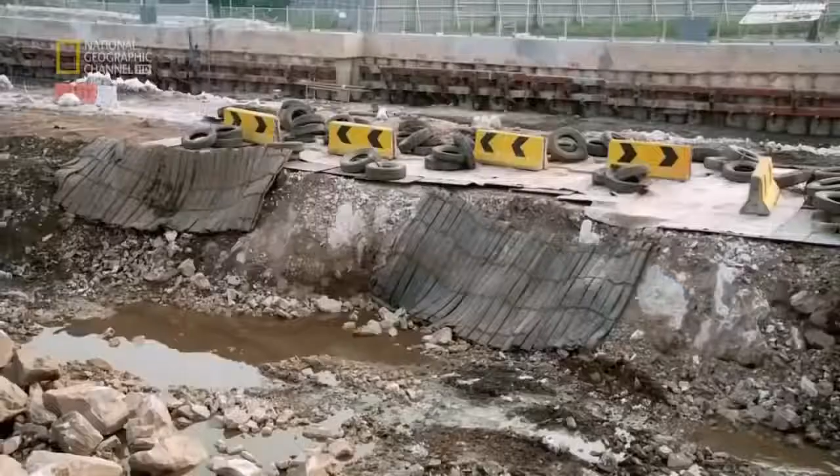Now there's an ambitious solution. A new transit system that will crisscross not only the city, but the entire region of Greater Kuala Lumpur. Huge machines will bore into Kuala Lumpur's treacherous bedrock to carve out almost 10 kilometers of tunnel.

Every day of construction, the engineers confront the perils of mechanical failure, fire, and collapse. Get it wrong and billions of dollars of investment could go to waste, and the streets of Kuala Lumpur and its pent-up economy will stay trapped in gridlock.

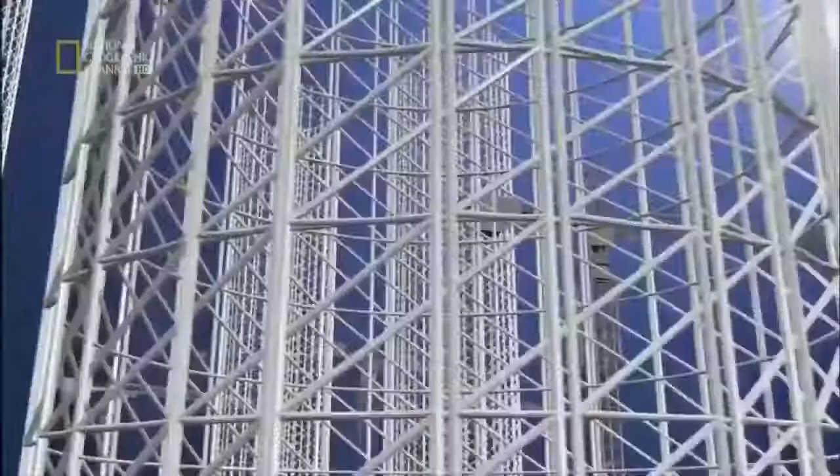Kuala Lumpur is one of Asia's most vibrant cities. It's looking to compete with the region's Asian tiger economies. Its magnificent skyline testifies to its soaring ambition. But at street level, it's a different story. The city is blighted by severe congestion that threatens its future growth.

Over 7 million people live and work in the Kuala Lumpur region, the Klang Valley. Every day, they head into town in 4 million cars. As an alternative, a light rail transit system was built. But over time, it has been overwhelmed, and connections are inadequate.

Now there's a solution. A new mass rapid transit system that will reduce the pressure on traffic and unite far-flung parts of the city. For any modern metropolis to be vibrant, to be competitive, to be on par with some of the leading cities in the world, you've got to have a modern public transport system.

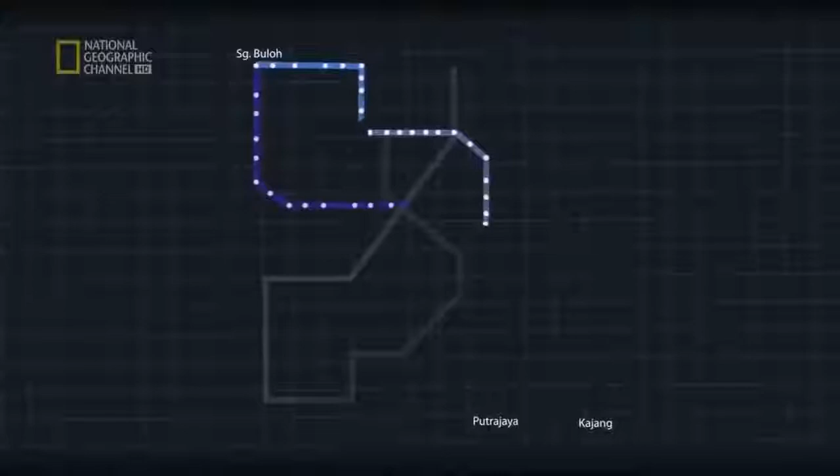The Klang Valley Mass Rapid Transit System, the KVMRT, is Kuala Lumpur's bid for greatness. 3 different routes comprising more than 150 kilometers of brand new lines. It will be seamless travel around the Klang Valley, especially the areas of high concentration population. And the first stage of the plan is the biggest test of all.

This is the Sungai Buloh Kajang line. It will stretch 51 kilometers with 31 new stations. And a fifth of the new line will have to be constructed underground. To do this, 10 giant tunnel boring machines, or TBMs, will be brought to Kuala Lumpur and set to work.

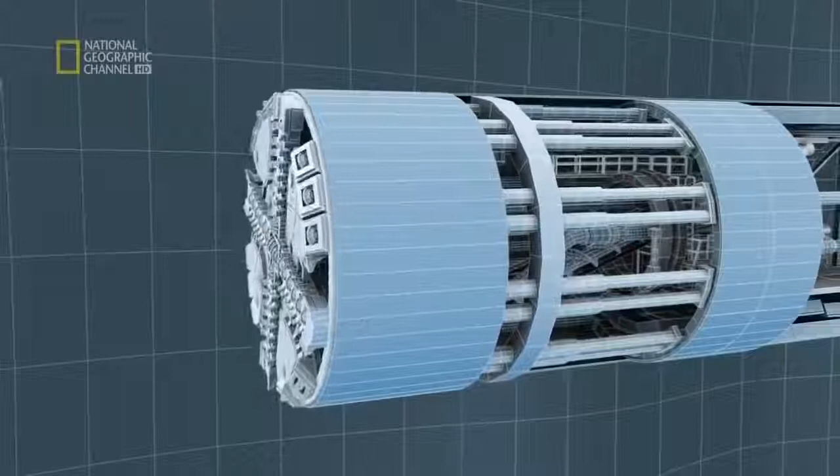These mighty engines do much more than burrow through rock, astonishing though that process is. As the huge drill crunches forward, the back end constructs the tough tunnel frame with high-strength concrete. In charge of this massive operation is engineering veteran Satpal Bogal.

Most cities now, for railway mass transit systems, the tunnels are built using TBMs because of safety issues and because of ground conditions. The underground section of the new MRT will be a perilous undertaking. For beneath Kuala Lumpur is a formidable engineering challenge.

Below the city are 2 very different kinds of rock, and the TBMs will have to deal with both. The western area is known as Kenny Hill, and the eastern areas as the Kuala Lumpur limestone. Imagine the difference between a Dutch Edam and a Swiss cheese riddled with holes. Dr. Uilian Hock is the project geologist and expert on Kuala Lumpur's underground world.

I got this Dutch Edam cheese here. As you can see, this whole piece of cheese is fairly homogeneous, very tight. And Kenny Hill, when it's bedded, it looks something like this. This is like the KL limestone. All right, this is Swiss cheese. As you can see, there are a lot of cavities and voids inside the cheese. These voids can be transmitted all the way to the other side of the cheese. Things can move in from one hole to another hole, and it may come in vertically and go out laterally.

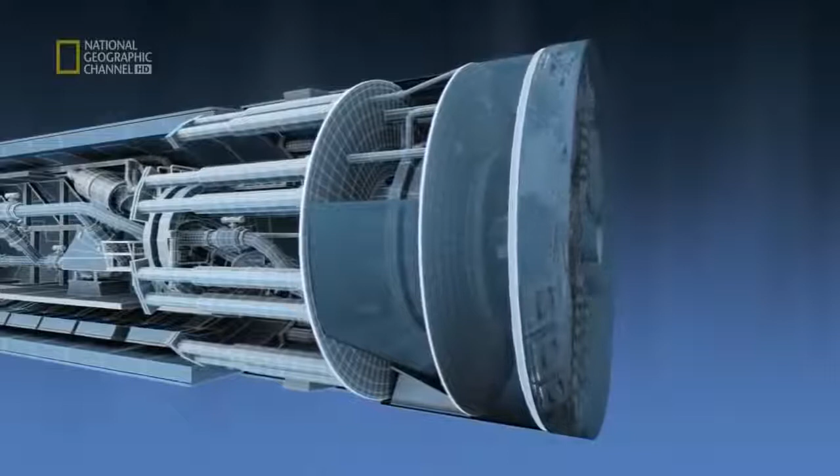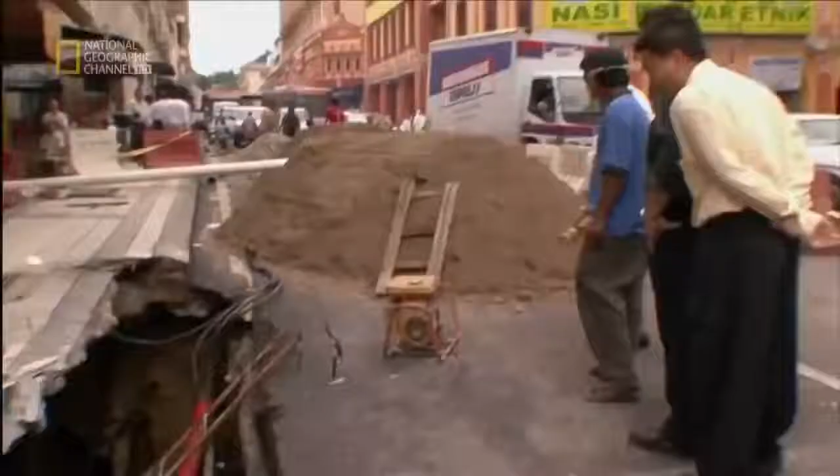This ingenious system was used by the engineers who built the SMART tunnel in Kuala Lumpur, the world's first combined storm and traffic tunnel. But builders learned some hard lessons about slurry. Ng Hawei was a rookie engineer on this project. We have the best machines in the world in the SMART project, but we still do have some problems. We just couldn't control the slurry and it easily escapes to the surface, creating sinkholes.

What Ng and the engineering team found, to their cost, was that the slurry they injected into the limestone cavities could escape into surrounding rocks and cause havoc, bursting from the ground like a geyser or creating sinkholes at the surface that might suck in people, cars, or buildings. Today, Ng heads the tunnel team building Kuala Lumpur's MRT system. And this time, he had to find a solution to the uncontrollable slurry problem.

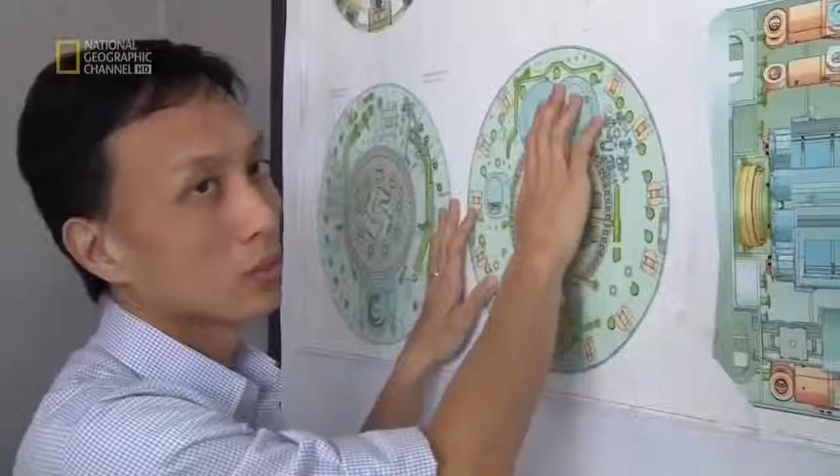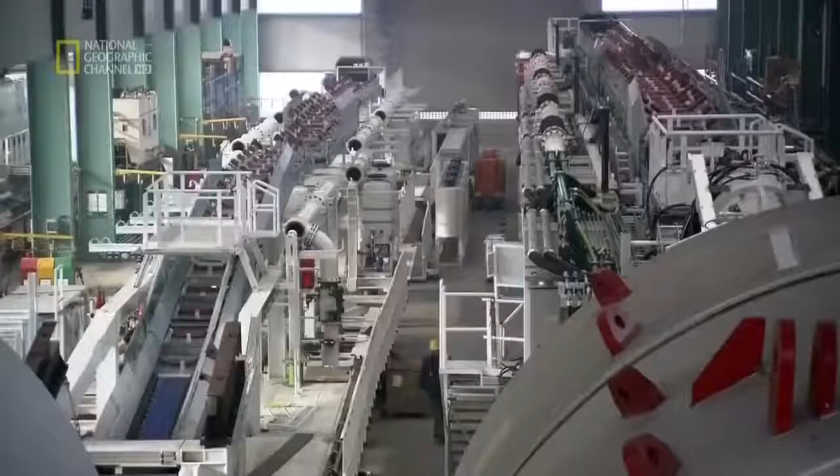Working with German company Herrenknecht, Ng and the team of engineers have come up with a revolutionary kind of machine. We throw in all the ideas, we have brainstorming sessions, we consult a lot of experts, we have to do a lot of research because no machine has been designed like this before. From these brainstorming sessions was born this mighty machine. Called the Variable Density Machine, it's the state-of-the-art tunneler. For the first time, a TBM can control the consistency of the slurry and take on whatever Kuala Lumpur's underground throws at it. Even the construction of this revolutionary machine is on an epic scale.

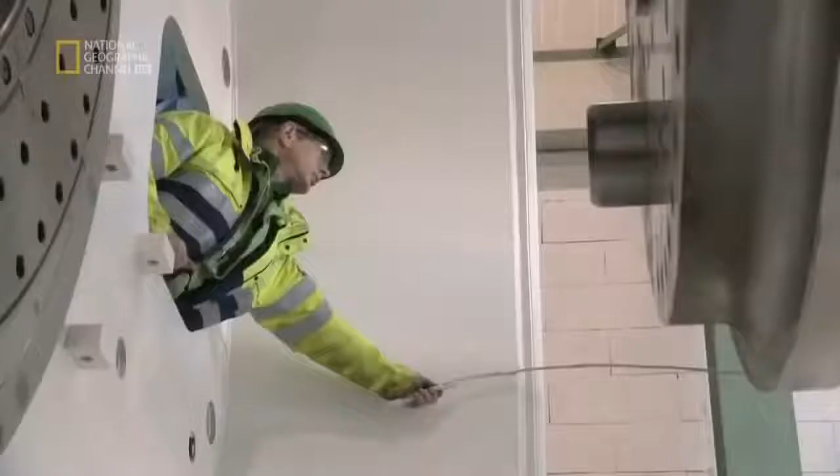Components are brought from all over Europe to be assembled inside the massive factory in Schwanau in Germany and other Herrenknecht plants in China. One machine like this is fitted together with about 40,000 pieces one by one. The design starts screw by screw, piece by piece, and this is brought together with all our 400 engineers. They do all these works to come to this level, what you can see today. It takes 9 months to manufacture the revolutionary TBM.

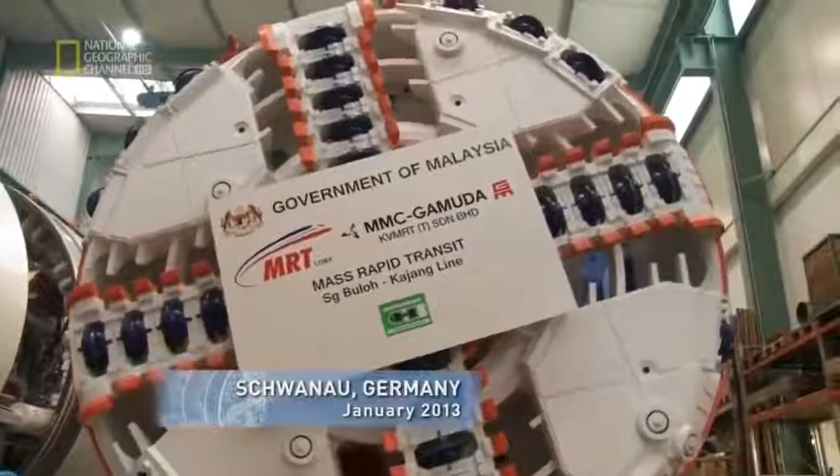Today, it's ready to be put through its paces. We have only seen it on the drawing board so far. So this is the first time that it is all put together. Everything is running, so we can check every equipment, including the cutter heads, the hydraulics, the safety features. This is the last chance for us to make final modifications before we send it to the site and put it in the ground. As the engineers work on the TBMs in Germany, work gets underway in Kuala Lumpur.

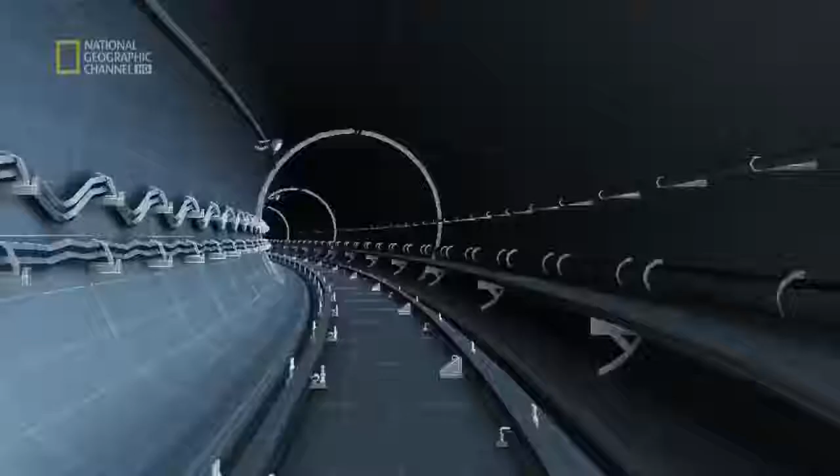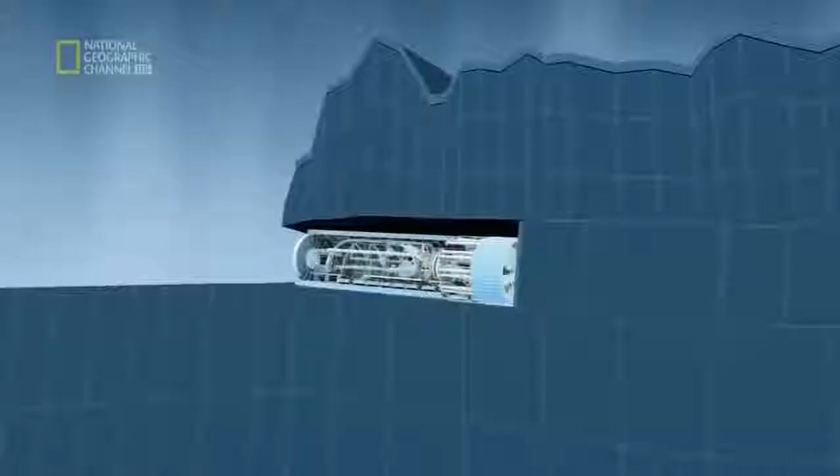The engineering company in charge of tunneling, MMC Gamuda KVMRT, must complete the job in 24 months and with minimum disruption to the city above. The operation is conceived on a military scale and with military precision. The TBMs will be launched from 4 different staging zones along the planned route of the underground section of the MRT. At the western end of the tunnel, the elevated section of the MRT begins its descent underground from the surface. But at the 3 other zones, shafts must be excavated so that the different TBMs can be put to work beneath the city. Eventually, the different sections of the 9.5-kilometer tunnel must all link together.

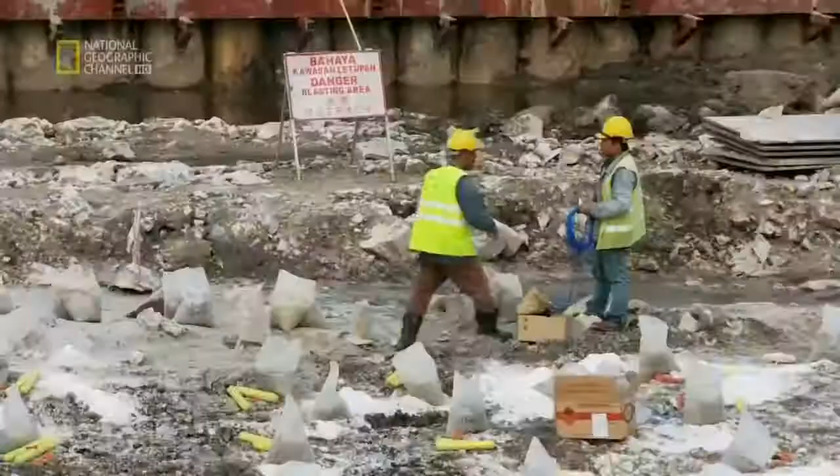Since July 2011, work on Kuala Lumpur's new MRT starts here at the Cochrane site. It must be dug out to a depth of 30 meters before 4 TBMs can be deployed. The huge staging zones will be blasted out of the ground. We have short time to meet our requirements, so we are working with frequent blasts, more than 2 or 3 blasts a day. The blasting must be carried out with rigorous precision, especially in a city as dense as Kuala Lumpur. So when you talk about blasting itself, it's dangerous.

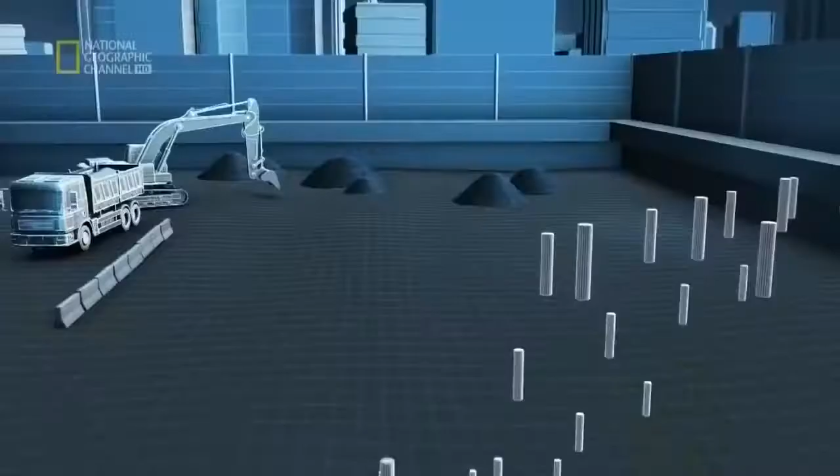You can see we've been surrounded by high-rise buildings. Now at the moment we're using about 150 to 200 kg. So that can bring a 10-story building down. The solution is to sequence each blast, creating a pressure wave that, in theory, won't damage surrounding buildings. These are the basic things we use. My hand now is explosive, which will be charged to the detonators over here, and it will be connected one at a time. And finally, we have relays. These will segregate the blasting rather than at one go.

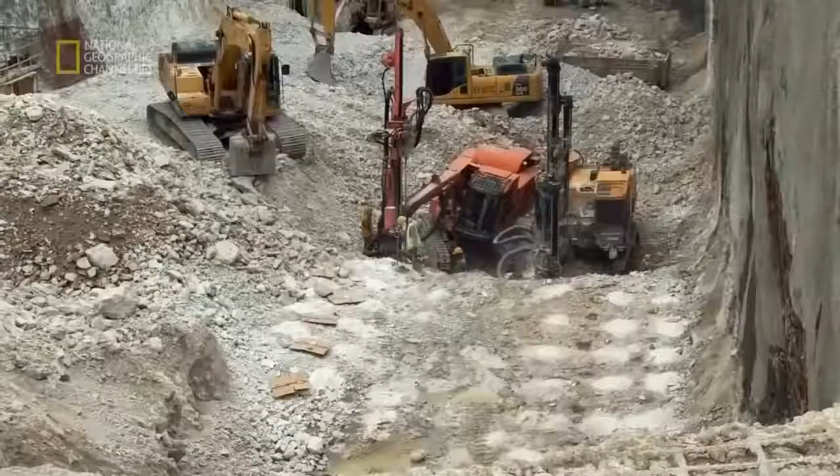Engineers dig rows of holes between 3 to 6 meters deep. Then the explosive charge is inserted inside with a detonator. These are connected to a central command point. But nothing is left to chance. Giant barriers of steel plates, truck tires, and concrete prevent debris flying from the site. The charge is set.

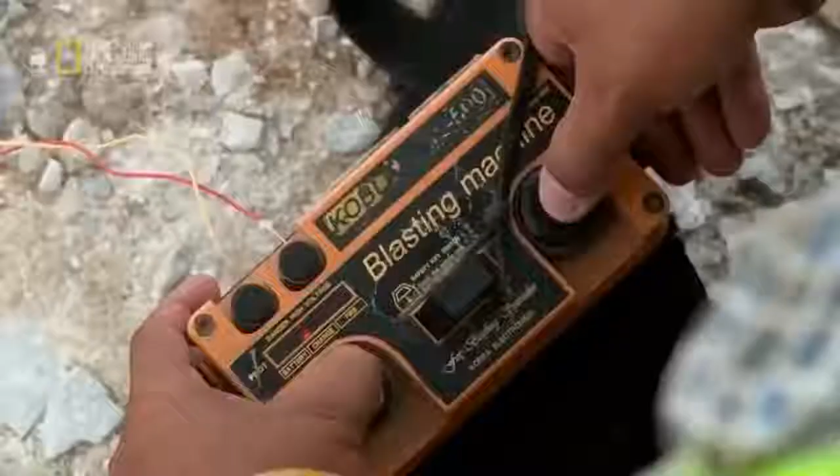The engineers have got the right formula, and the surrounding buildings are safe. The blasting continues at the Cochrane site for 7 explosive months. Enough rock and soil to fill 50 Olympic-sized swimming pools is blown out of the ground. And finally, the site is ready to receive the first TBM.

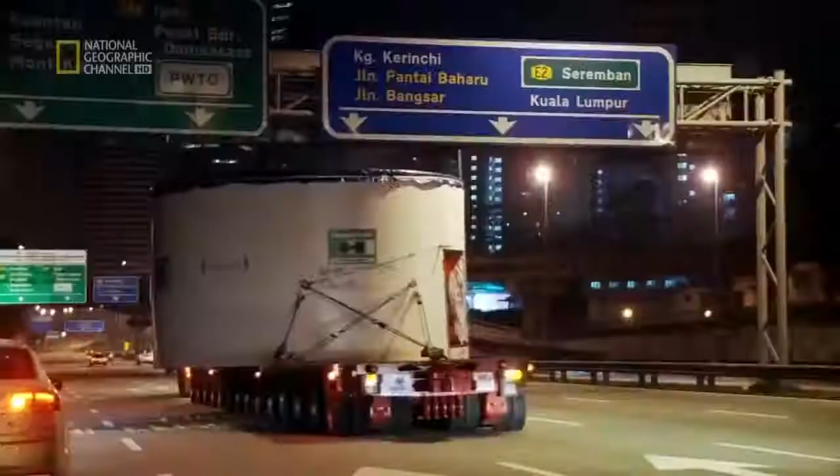Its code name, 774. At the beginning of 2013, the first new model arrives in Kuala Lumpur. The giant machine is transported in parts to the Cochrane site on huge lorries. But that's the simple part. Now the 160-ton monster must be lowered into the excavated shaft so that they can start chewing into bedrock.

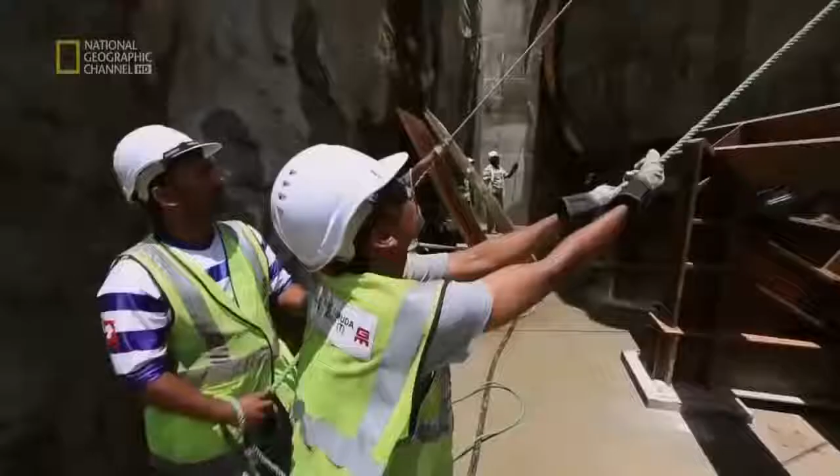To lift it down 30 meters down the shaft, we have to be very careful. Anything can go wrong and then we are stuck. It will push back the whole project completion by a lot. At the site, everyone is holding their breath as the TBM begins its descent underground.

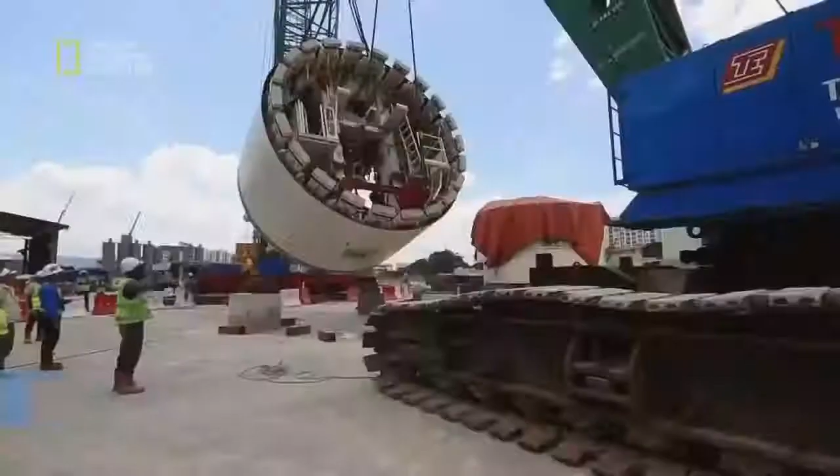Malaysia's capital, Kuala Lumpur, is being transformed into a huge building site. A new MRT system is under construction. Close to 10 kilometers will be built beneath the city, and a revolutionary new tunnel boring machine, or TBM, is brought from Germany. The first to be sent into action weighs 160 tons and has to be delicately lowered 30 meters to the tunnel entrance.

The man in charge of the tunnel operation is Ng Hao Wei. He won his spurs building Kuala Lumpur's famous smart tunnel. We are dealing with very delicate components. We cannot afford to damage it. If the extent of damage is huge, then the impact to the project will be tremendous.

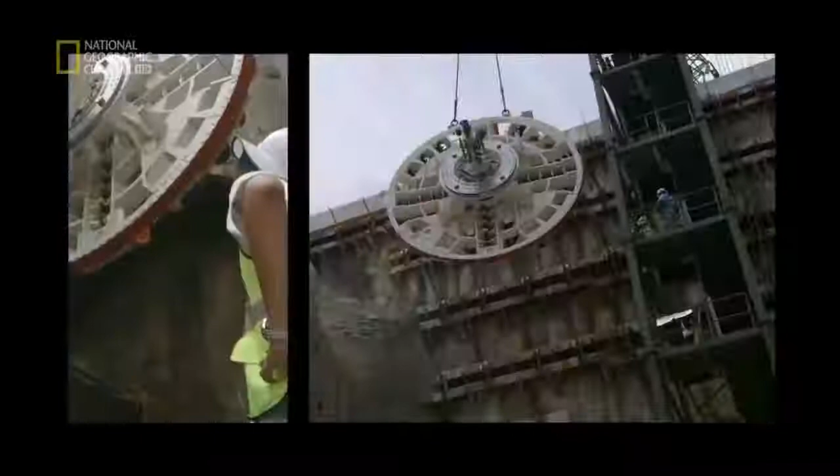This is literally the cutting edge, the business end of the huge machine. The circular cutter head weighs 70 tons with 37 tungsten carbide cutting discs, which are stiffer than steel and denser than titanium. The entire TBM is 135 meters long, almost double the length of a 747 jet airliner. Each TBM has 10 interconnected gantries to support the operation.

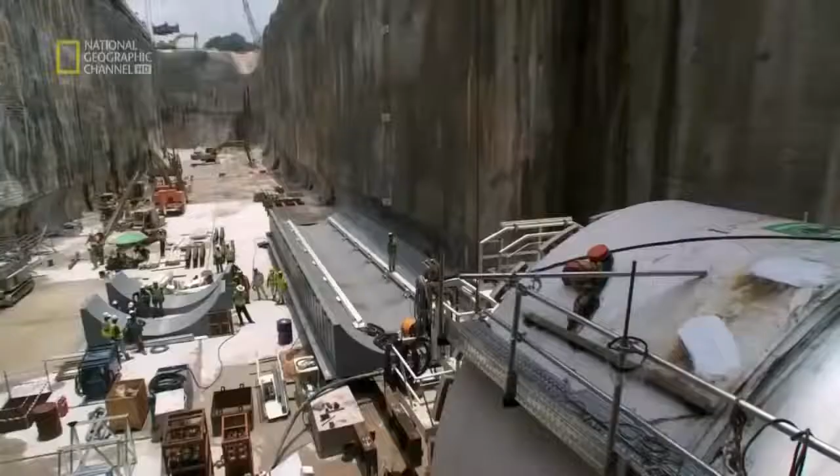Only 3/4 of the shaft has so far been excavated, so the monster machine has to be assembled in sections. We assemble up to the 6th gantry, which will give us the key components of hydraulics and electrics, so we can start to launch the machine, at the same time give sufficient space for the shaft excavation to go on. It takes just under 3 months for the TBM to be assembled.

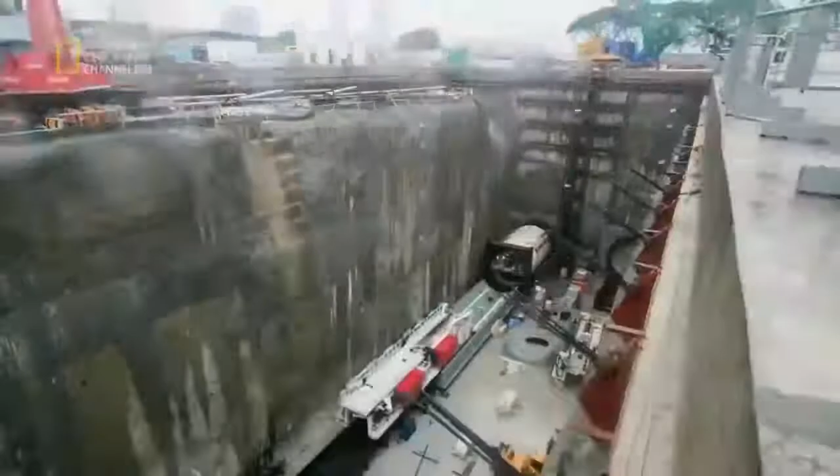The Prime Minister of Malaysia launches the very first variable density TBM. It's actually a technological marvel. And it goes to show that, in partnership with a German company, Malaysians can offer a lot of our technical guidance and advice. This is something that we can be really proud of.

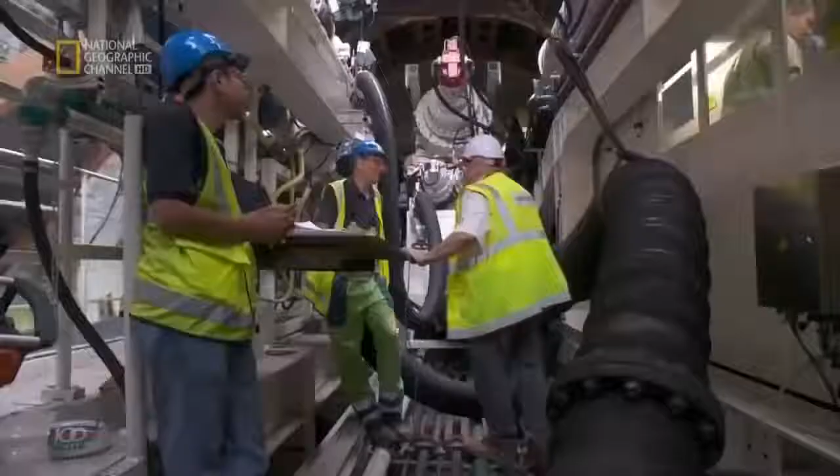One day later, Ng Hao Wei and his mentor Gustav Klados arrived to check on the machine's progress. Gus, a veteran Austrian tunneler, has worked on some of the biggest tunneling projects in the world, including the Channel Tunnel linking Britain and France, and the Smart Tunnel here in Kuala Lumpur. This tunnel warrior is the team's project manager and is thrilled to be working back in the city on the new machine. It's uncharted territory. We are trying out something totally new.

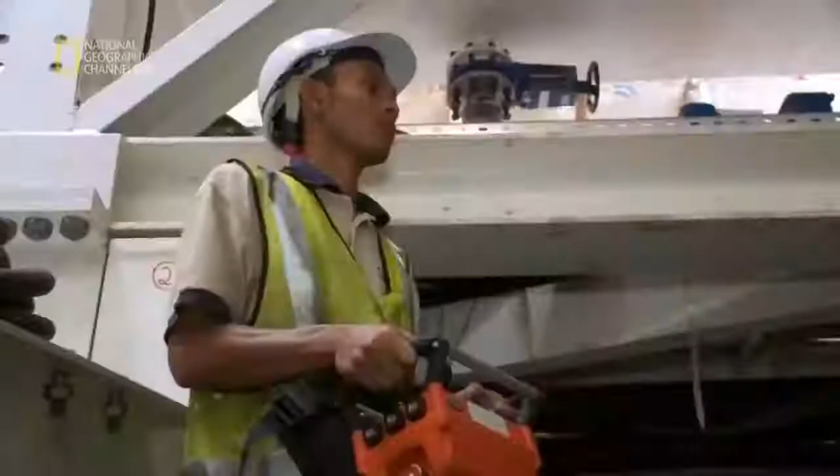A lot of people at the beginning said, no, it won't work. But now it is excavating. You can hear the stones moving around in the pipe, so it's a fantastic noise. It's my favorite. Much better than in the office. It's not just the machines that will need breaking in. The giant TBMs must be served by an army of workers, day and night, week after week, month after month.

I'm new here, but I try to make my best every day. Everybody starts as new. Trust me. Me too. I did start as a new guy. Do you? Yes. My first job was to go and count the number of nails and bolts and nuts in the stores. And I went there and literally counted them for a week. When I finished, I went to the storekeeper and he told me that we usually use a scale.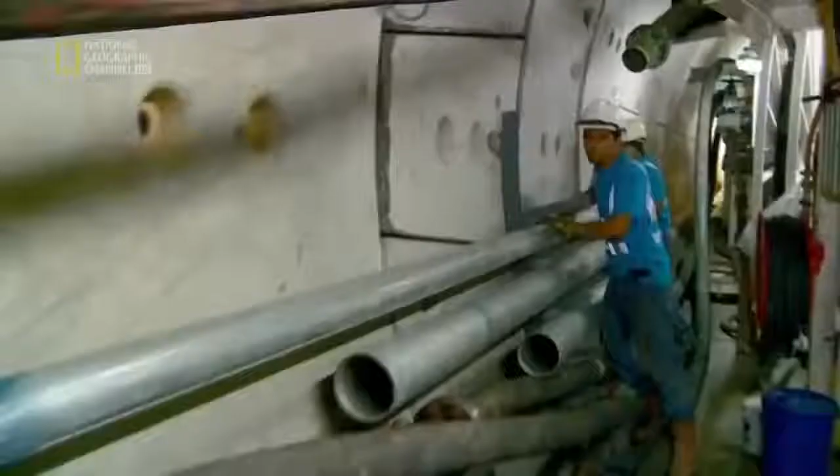The MRT tunneling project will need thousands of workers over the 2-year period of construction, and MMC Gamuda set up an academy to train the hundreds of workers needed to finish the tunnel on time. Veteran or newcomer, the team faces a daily avalanche of problems, and right now, the problem is pretty basic. The TBM is just not picking up speed. 8 millimeters a minute. Not very fast. Yeah, but it's all right.

At this pace of tunneling, the project will take 4 years longer than expected and run millions of dollars over budget. But veteran engineer Gus Klados hopes that the giant machine will soon pick up speed. In the next few months, it is just to sort of break in the machine like a horse which has never been ridden before. And I am convinced that we will make it work.

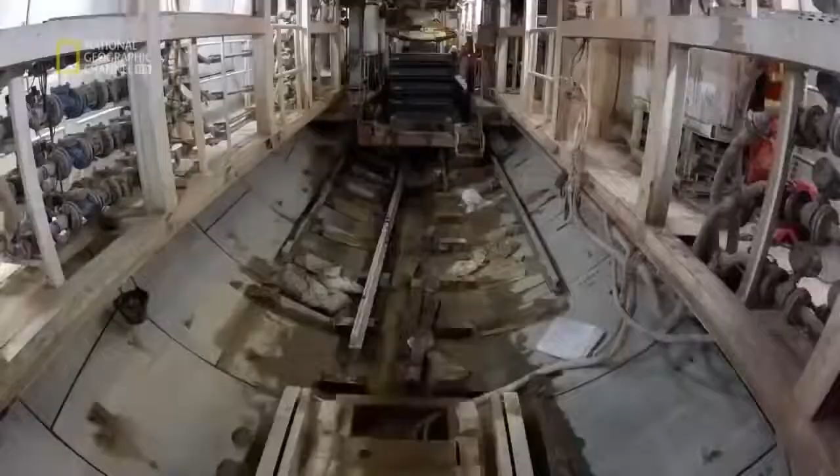The team is under pressure to complete the tunneling works on time. In the tunnels, the TBMs never stop mining. It's a 24-hour operation. And 3 weeks since mining began, the giant machine has at last picked up speed. The TBM is like a huge underground factory, drilling, building, and spewing out waste.

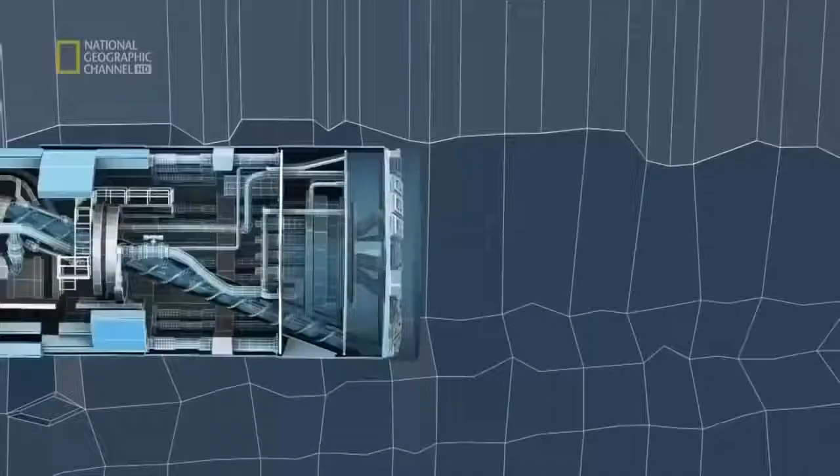The heart of the entire operation is in this tiny space. So what's happening? Pressure sensor number 4 is broken wire. Control cabin means the heart, the control center, the heart of the TBM where everything is controlled. If you're building a skyscraper, visibility is not normally a problem. But underground, it's a different story. You can't see through rock.

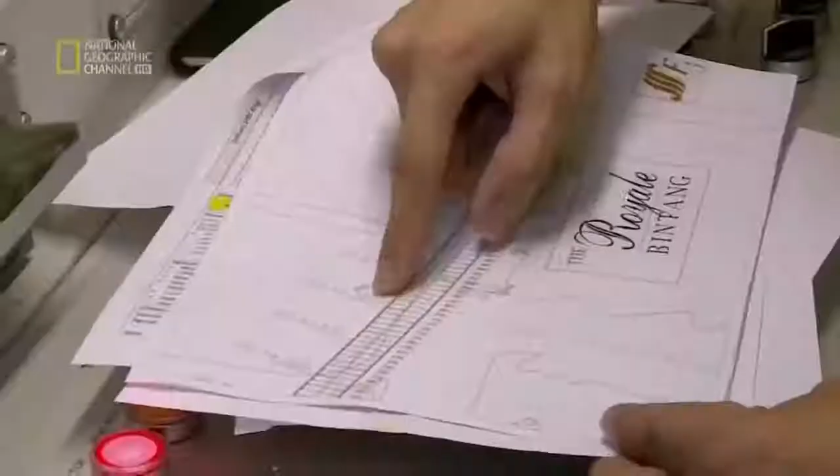So to give the TBMs underground eyes, the machine is equipped with arrays of sophisticated sensors. It's like when you are working in a submarine. You have to depend on the sensors, you have to depend on communications, you have to depend on eyes. Other than yourself, you can't see anything. Inside the control cabin, engineers can work out with absolute precision the real-time position of the TBM, calculate changes of direction, and when to start lining the tunnel wall.

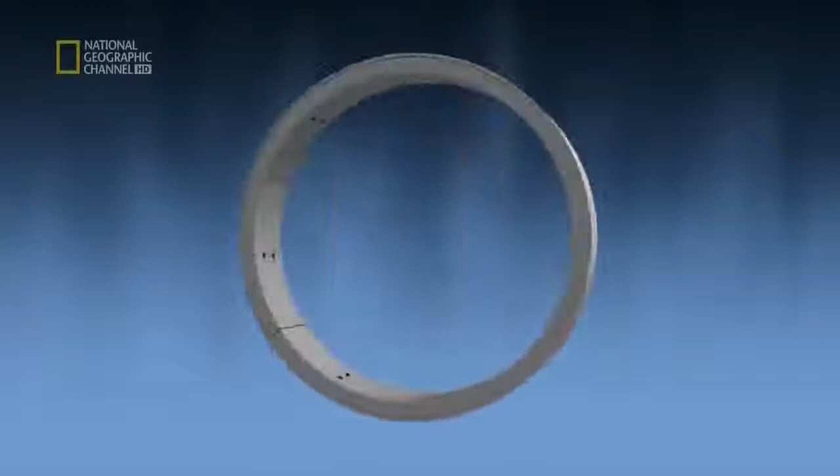After a mining of about 1.4 meters, we will build the segment piece by piece and then build them up like a jigsaw puzzle. These tunnel rings are made from 7 segments plus 1 keystone that holds everything together. The concrete wall segments can withstand extreme pressure 30 meters underground. All day long, concrete segments arrive at the TBM. Each segment weighs 2.2 metric tons.

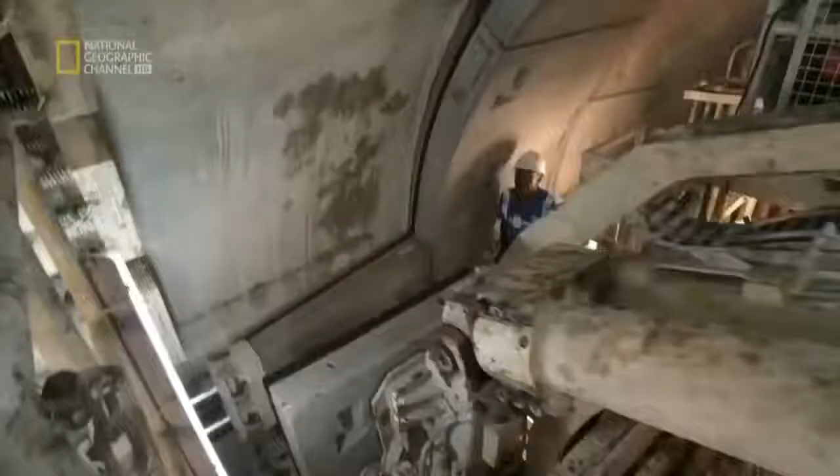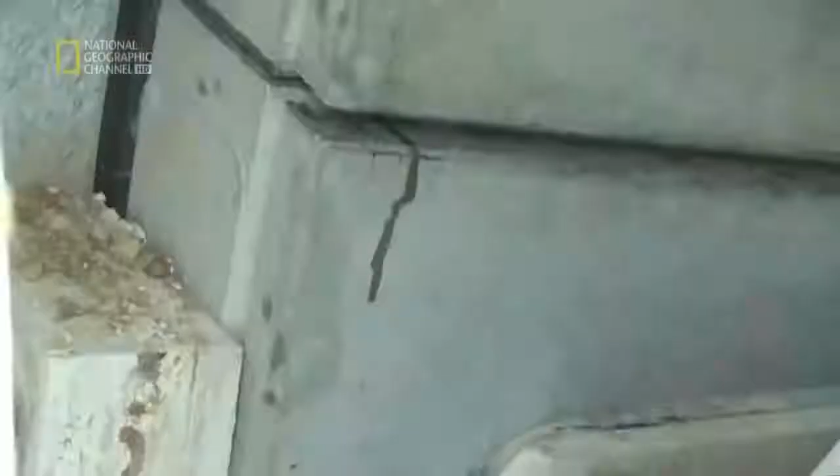Giant hydraulic arms swing the segments into place using the TBM's vacuum erector, which uses the power of suction to raise and position each segment. Precision is essential. If any one of these segments are wrongly positioned, the consequences would be catastrophic. So it's very important to drum into the ring building team that they have to build it to the required tolerance of a few millimeters precision. If we are out from tolerance, the water will find its way to seep through and we'll have a great problem to seal it up.

Over time, as graduates of the Tunnel Training Academy get more experience, the process builds up momentum. In the first week, the teams managed to place just 3 rings a day. 3 months in, and the rate is 5 times higher. The campaign to excavate Kuala Lumpur's new MRT tunnels is about to enter a more intense phase. By November 2013, 4 TBMs have been successfully launched from the Cochrane site.

But at another launch site near Inai Road, the engineers have run into difficulties. Here, 2 circular shafts are being excavated to 30 and 45 meters in depth. But as the shafts are blasted out of the ground, disaster strikes.

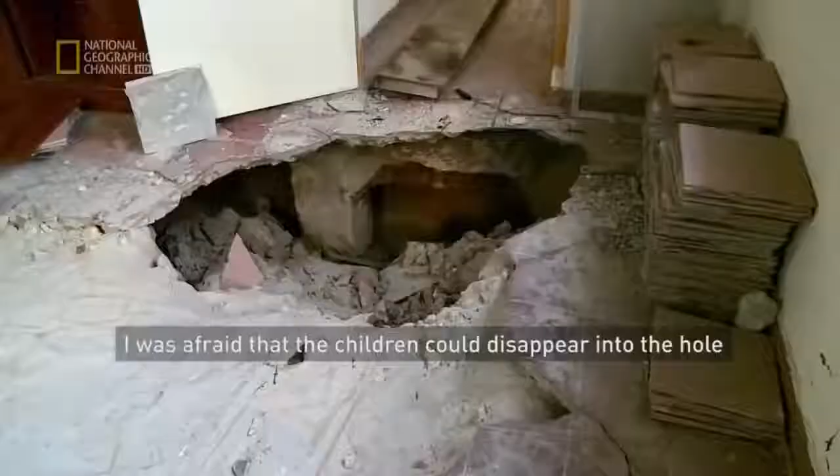In the heart of Kuala Lumpur, the new MRT project has hit a snag, a hole-shaped snag. Mr. Jamaluddin lives 50 meters from the launch site on Inai Road, where 2 shafts are being blown out of the rock.

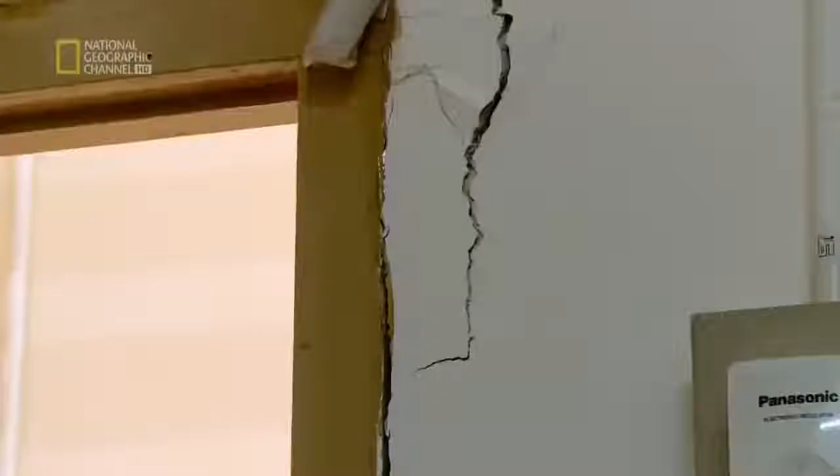The hole in the garden is frightening enough, but the condition of Mr. Jamal's home is even more alarming. Floors dip and cracks ripple up walls and across ceilings. The family home is falling apart.

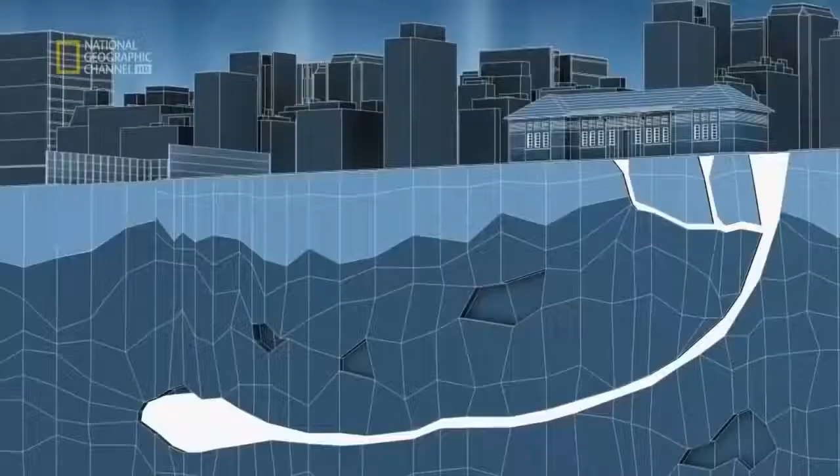In limestone, what happened is that the solution features can be connected laterally and vertically. What happened is we drill a shaft. So this hits a connection. When there's a hole, it's like a pipe culvert. If you have a culvert connecting from the shaft to underneath Mr. Jamal's house, that forms a very easy flow passage of water, bringing the soil from underneath Jamal's house into the shaft. And that results in sinkholes.

And it's not only Mr. Jamal's house that's in danger. Water is pouring in from the walls in the deeper of the 2 Inai shafts.

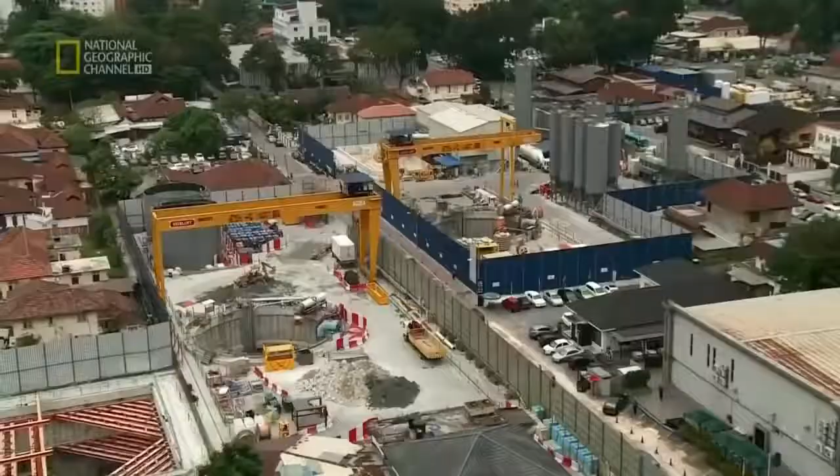It's unstoppable, and the situation is a tough call for project director Satpal Bogal. We couldn't stem it. And the decision was taken to backfill it for safety. And that decision then followed on to other changes to the program. Abandoning one of the 2 Inai shafts is a huge setback. Now only 1 TBM can be launched from here. This means that a new strategy has to be devised.

The first TBM to be brought to Malaysia, 774, that has been mining from the Cochrane site, must now make up the difference and tunnel more than twice the distance. It will put the complex machine under severe strain. It's not only flooding that makes the Inai launch site such a headache for the engineers, it's a very tight fit compared to the other launch sites.

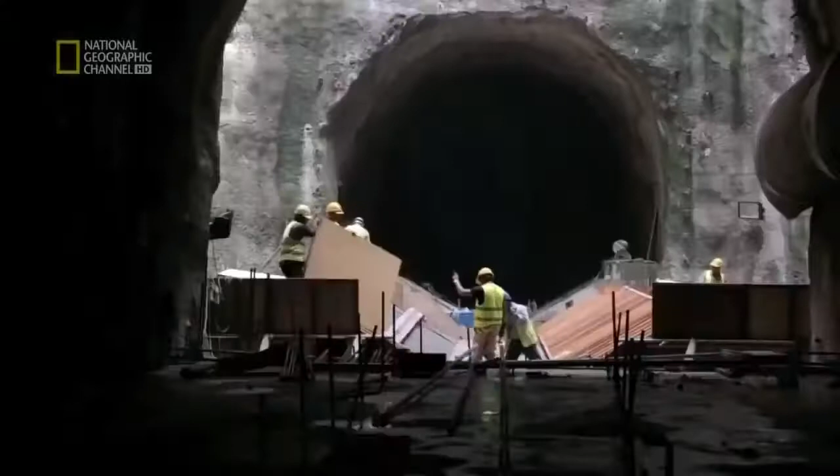Tunnel engineer Aslan Marzuki is in charge of getting the huge TBM to the bottom of the shaft. It's a smaller shaft. It's not a square, it's a circle. That's a safe space, but that means that our launching is going to be staggered. The team will blast out tunnels on both sides of the shaft. Then the front section of the TBM is inserted. Next, 3 out of the 10 gantries will be lowered one by one, followed by the giant screw.

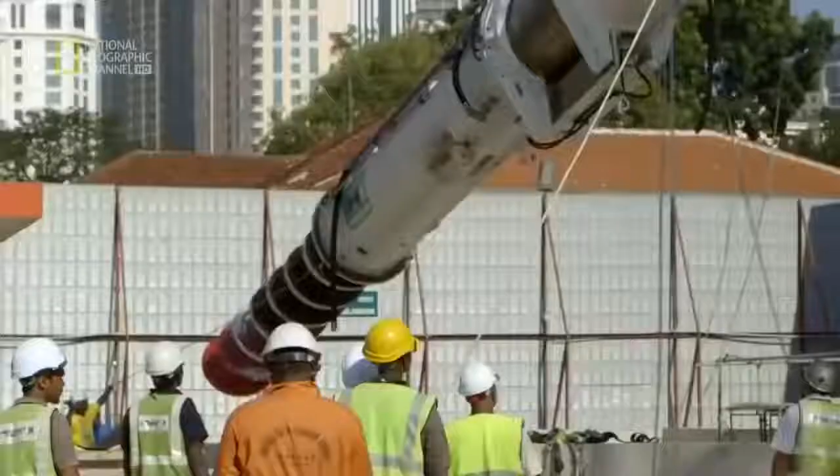The problem is that the 18-meter screw segment is longer than the width of the shaft. Behind me, this is our biggest component that's going to be lowered down. It's the most difficult one because this length is actually bigger than the shaft itself. The solution is simple, but risky. The screw segment of the TBM will have to be lowered into the shaft at an angle.

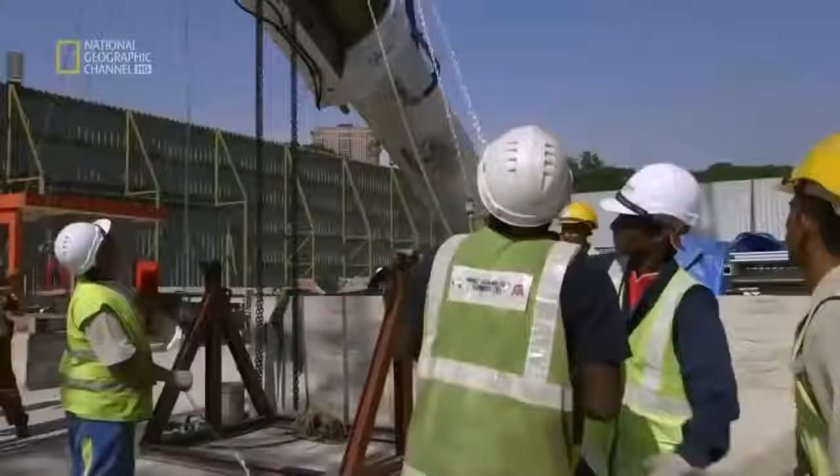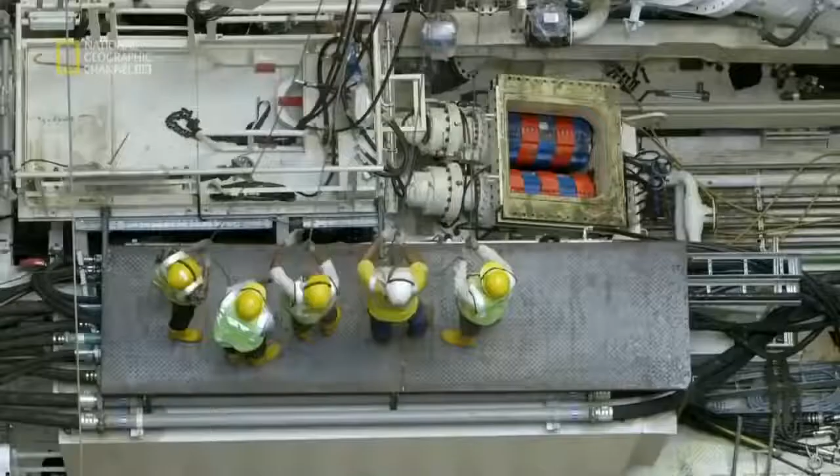The angle of descent has to be lowered. It's another fiddly maneuver with a lot of complicated machinery at stake. When you lower it down, the final angle is 15 degrees. Down there, you still have to do the same exercise again, but it has to be a slow process. After 2 hours, the screw conveyor is finally in place. It takes 3 months of hard slog to put the TBM together, but at last, it can begin burrowing into the limestone. This underworld is packed with hidden dangers.

Like Swiss cheese, the rock is riddled with cavities that could wreck the multi-million-dollar boring machine. When you're tunneling this way and you have a cave directly underneath your cutter, and it's big enough that you cannot develop a face support and the thing just dips inside, in that situation, then we are snookered. It will take us months to recover or to bring that TBM cutter face into operations again.

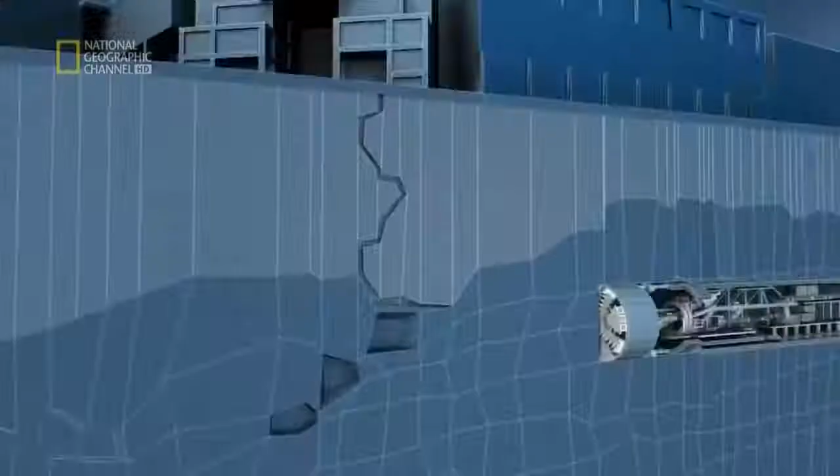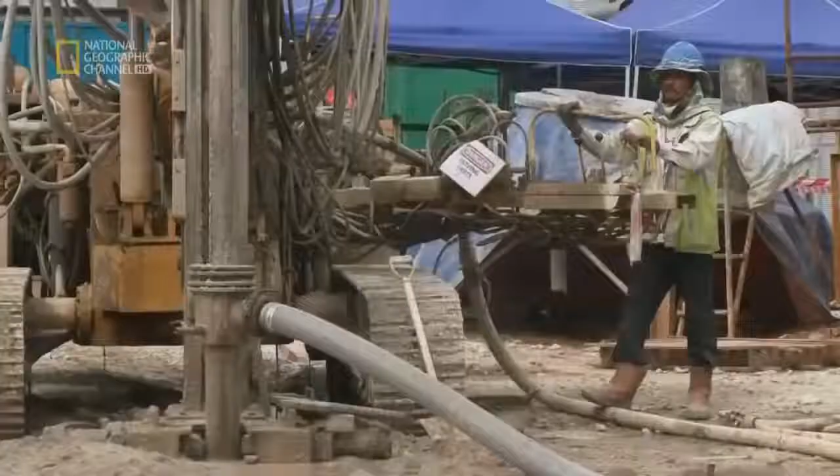So as the huge drill edges forward at 14 meters a day, an army of engineers is busy scouting the perils that lie ahead. They drill hundreds of boreholes into the layers of rock. Once a cavity is detected, concrete is poured into the hole to shore it up. It's a process called grouting. If we do encounter such a thing, then we'll do a lot of compaction grouting to fill up this void, like you go to a dentist to fill up your cavity, to ensure that when we are tunneling through, the TBM can go through safely.

But some cavities can be less than a meter wide. These are much harder to fill, but still pose a threat. There's no way we can pick it up. We are unable to treat all these features along our tunnel alignment. So what we then need, we need a machine that can cater for all these little challenges. Enter the new breed of tunnel boring machines.

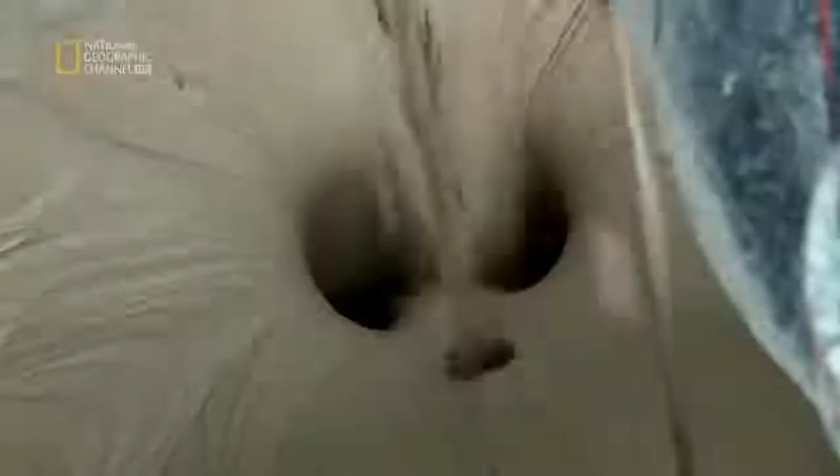Behind the drill, a sealed high-pressure chamber is pumped full of liquid called bentonite slurry. Unlike previous models, the new TBMs can control the density of this thick gray liquid, changing the consistency from a thin watery liquid to a thicker honey-like substance. The thicker slurry is used to fill these hidden cavities, and its density prevents it escaping through the porous rock to the surface.

The machine is able to operate at different modes at the flip of a button or some switches. So by doing that, in situations where we have major loss of slurry, we can then switch to a thicker density. It's kind of a little paste that chokes this up, and then we can mine through very easily. The revolutionary new tunneling system soon proves to be a success. But there is a problem that all tunnel engineers fear at the back of their minds.

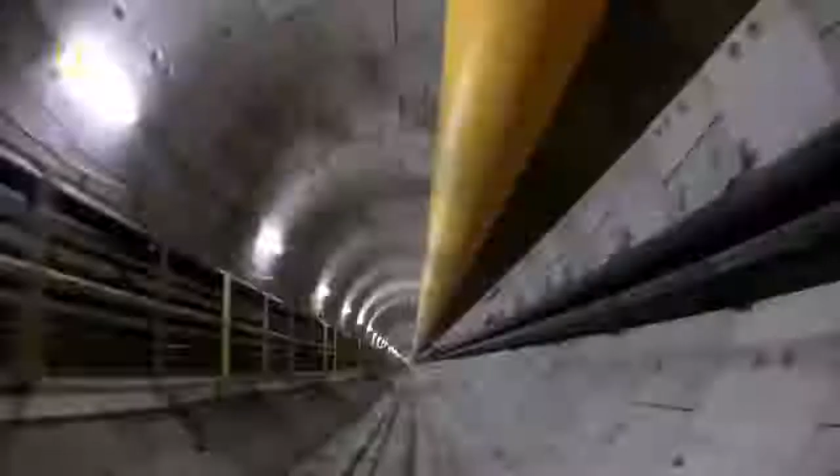Fire, every tunneler's nightmare. For engineers excavating Kuala Lumpur's new MRT system, the most terrifying scenario is a fire in the tunnel. A blaze can suck oxygen from the air in seconds. Workers can suffocate with terrifying speed, and the tunnel itself works like an oven, insulating the environment and ramping up temperatures to deadly levels. Tunnel workers must be ready to react at any moment, and training exercises are made as real as possible.

Christopher Fenton, head of safety, health, and environment for the underground, is training the company's emergency rescue team. Tunnels are very dangerous during construction. Fire is the last thing we want, and we need to be able to respond to it very quickly if it did happen. He has brought in two fire experts from the Los Angeles Fire Department to help with the training. We can go in here and create real live fire scenarios, and we can actually see those real life smoke conditions, whether it's good smoke that we can go in and find the seat of the fire and put it out, or they're so bad that we have to exit.

The men and women gear up. Anytime when we're in here and you see your neighbor confused or disoriented, you speak up. Tell me or another instructor, and we will fix it. Okay? Everybody good? Thumbs up. The calm smoke like this, lazy, sleepy. Okay, go in.

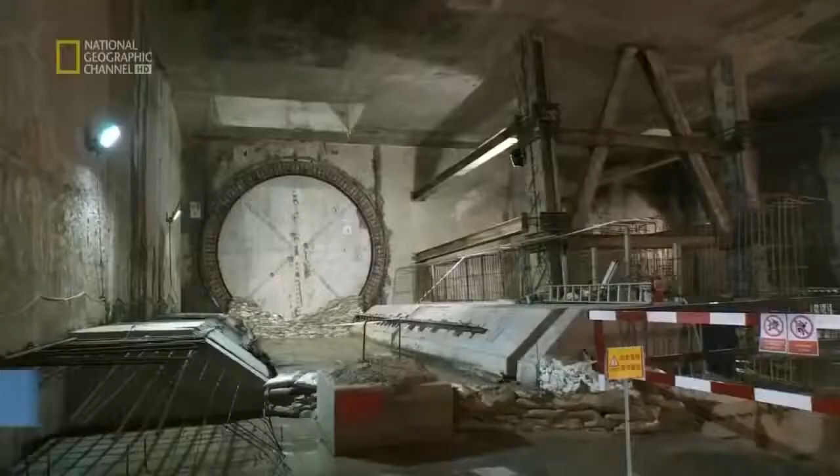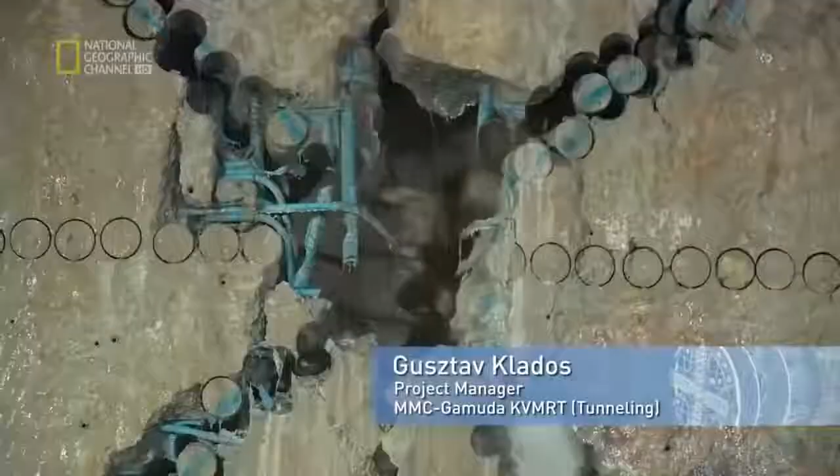Christmas Eve 2013, and the MRT engineers have cause to celebrate. One section of the tunnel, where the MRT line dives underground at Semantan to the Museum Negara station, has been completed. It's the project's first breakthrough, and at any moment the TBM drill head will emerge from this tunnel. It's an anxious wait for tunnel manager Chin Raymond. I told him if it doesn't come in the middle, it has to jump off a cliff somewhere. After drilling for 6 months, the TBM punches through right on target.

Congratulations. Thank you, boss. Well done, man. Okay. Good. Yes, great. Finally, I pushed my machine, it came in. I've been working for more than 24 hours. I can have a good rest to enjoy my Christmas.

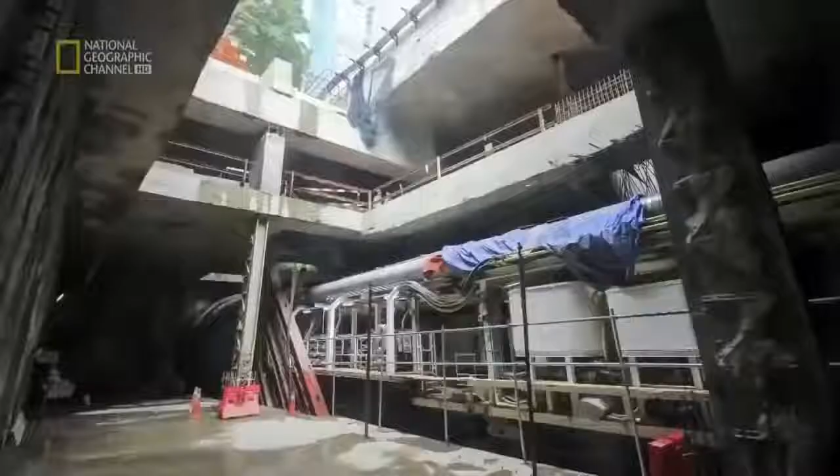But the machines don't get a holiday. As soon as the TBM completes its breakthrough, it is hauled into position to begin work on the tunnel that will link Museum Negara to the next station. The TBM is now burrowing beneath the historical heart of Kuala Lumpur. The Museum Negara is a repository of the nation's history and culture. Its facade is lined with precious mosaics. Further along the path of the excavation is the old railway station, an icon of the past that stood the test of time. But can it withstand the mighty TBMs as they thread their way nearby?

We were stuck with having to cross under some sensitive structures, and the ground settlement would affect the existing structures. If there's too much ground settlement, the buildings could collapse.

For the old building, actually, we had to pay much more extra care because we don't know how good the structure is, don't know how good this building's foundation is. So we had to take extra precautions on that.

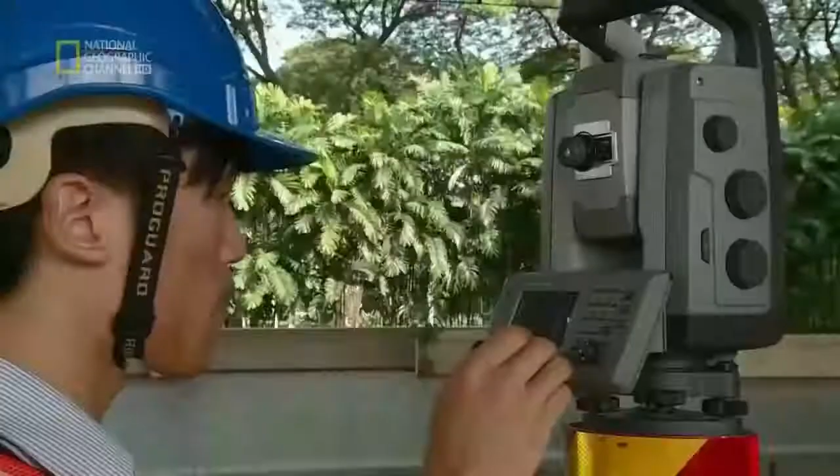A team of surveyors now equip these venerable buildings with highly sensitive sensors that monitor every vibration. As the TBM approaches, Tae Chi Yong and his team of surveyors nervously carry out hourly tests to monitor the old buildings. The TBM is below this building directly. We get to monitor the effects and the impact of our TBM drive on the structures above, on the surface above. It's a nail-biting 5 months of constant monitoring as the TBMs negotiate this historic region.

And at last, the TBMs inch past. The iconic buildings are safe.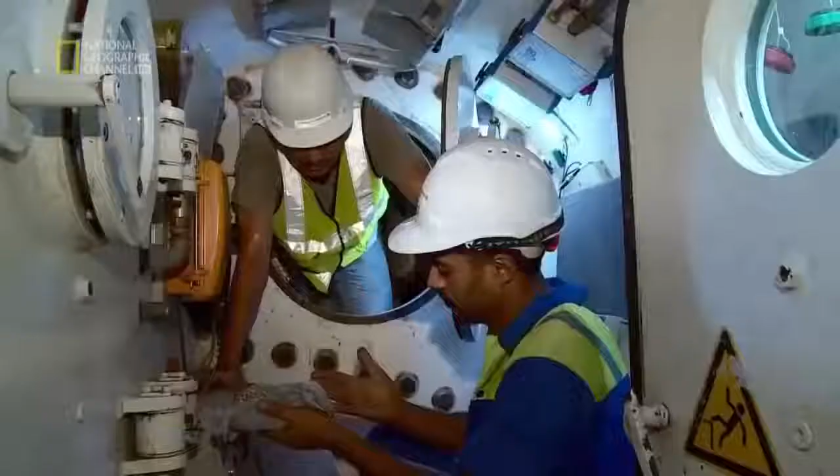While the people of Kuala Lumpur get used to living and working in a massive work site, where giant boring machines gnaw away at the city's bedrock to build a new MRT, the President of the United States will be descending on Malaysia in 3 days' time. But all is not well with TBM 774. Located less than 400 meters from Obama's planned accommodation, the TBM gets a bad case of indigestion and is unable to process the waste from the cutter head. It has come to a halt.

Directly above the TBM, a team is tasked with monitoring road surfaces to look for any signs of trouble. Called the Bull Gang, it is led by Michael Poon. We have a team of people patrolling 24 hours. We have to check on the surface. This morning I walked by, I saw some settlement. It's just a small depression. I can see the hole. It's quite deep. At the surface, the cracks don't seem to pose much of a threat.

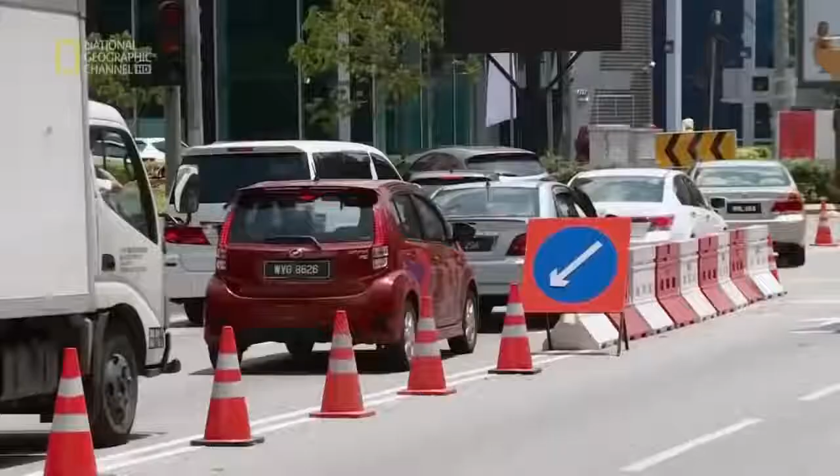But like icebergs, most of the danger is hidden. Down there is a void big enough to fit an electric car. We have an unscheduled stop. They have to lower all the slurry. That means the face support is affected, and that causes a depression or a sinkhole in front of the cutter face. An emergency response team reacts immediately. The road is closed to traffic. Then we decide to order mortar to fill up the hole. The hole is quickly filled with 5 cement trucks of concrete, and frantic repair works continue inside TBM 774.

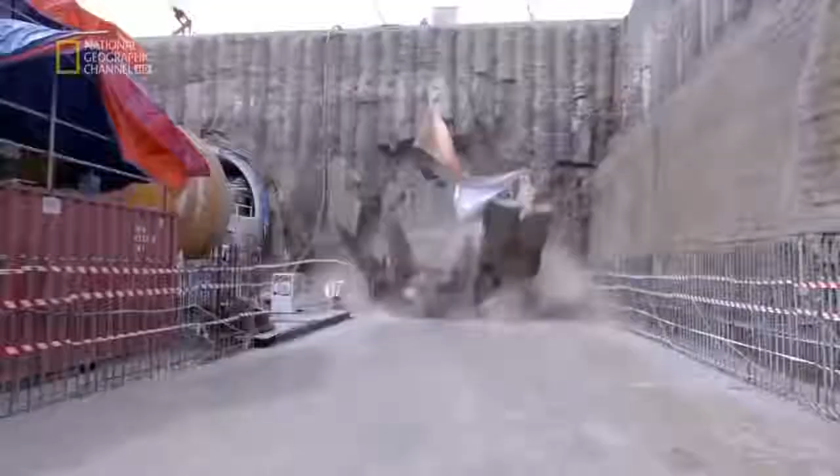Across town, there is reason to celebrate. The 5th breakthrough of the project will take place today. It's a landmark moment. It means that 50% of the tunnel has been completed. Well, every breakthrough is like landing a plane, right? Once you're there, you feel great because, you know, you brought home the TBM.

The breakthrough, I thought it was very exciting. Now we finished everything. It's very, very good. I'm very content with the progress as well. The quality of the tunnel linings that we have in the precast concrete inside is one of the best. We work as a team. We work night and day, blood and sweat, hard time, good time. This is the prize for all the crew. This is like a present.

But the celebrations are short-lived. As TBM 774 finally starts mining again, President Obama arrives in Kuala Lumpur. But to the horror of the team, another collapse occurs just meters away from the earlier sinkhole as the president is at the official state dinner. This new sinkhole is an even bigger problem than the previous one. Ground movement has broken water pipes, and the hole is filled with live power cables.

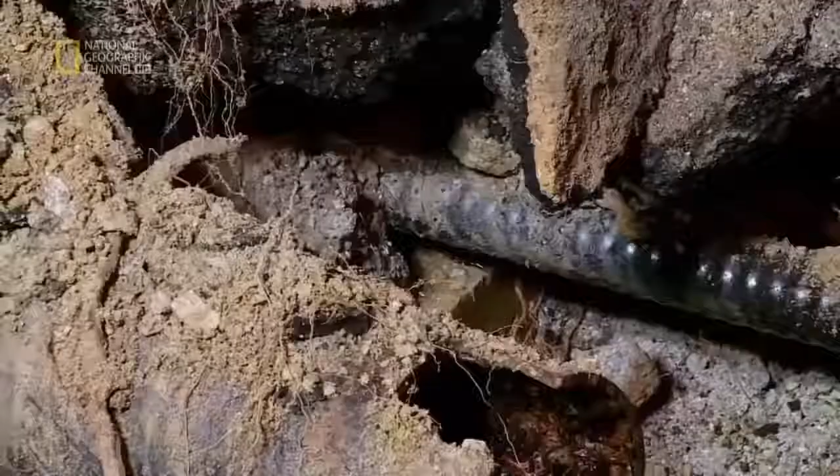President Obama is living nearby. We definitely do not want to cut off water and power to where Mr. Obama is living, obviously. So we're trying to get this done in the quickest time possible. Racing against time, the Bull Gang takes 5 hours to repair water pipes and fill the hole. As they work into the night, President Obama and his entourage are blissfully unaware of the battle that is being fought less than 400 meters from their hotel.

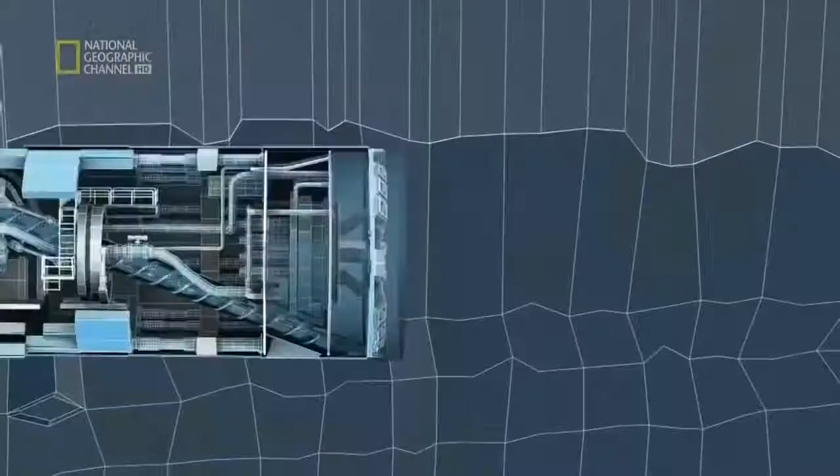TBM 774 is now approaching the zone where the underground geology changes from the karstic limestone to the Kenny Hill Formation, from Swiss cheese to Edam. We are going through a very distinct change in ground conditions. In normal cases, you will need to use 2 different types of machines, and you will need to have another launch shaft to do this. It will take months. But the new variable density TBMs can be retooled underground.

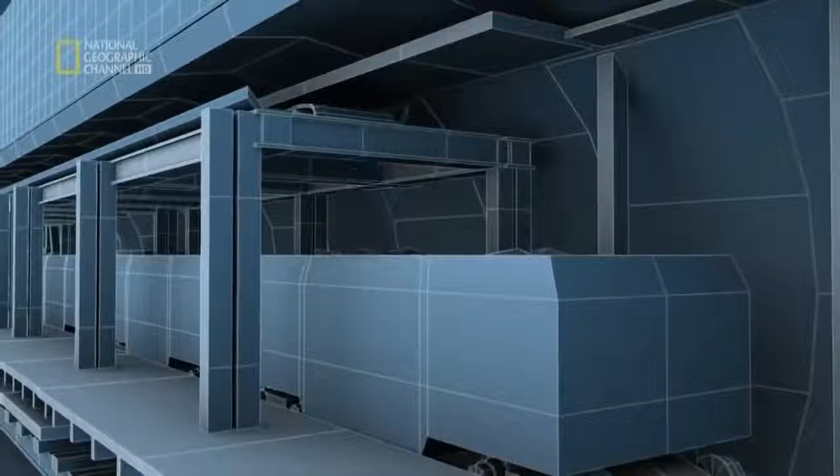It's a matter of changing the way waste is extracted. Instead of extracting through pipes, it needs to be removed with a system of conveyor belts right to the end of the gantries onto these so-called muck cars. The conversion takes 1 week to complete, but it's a much smoother process than the older system.

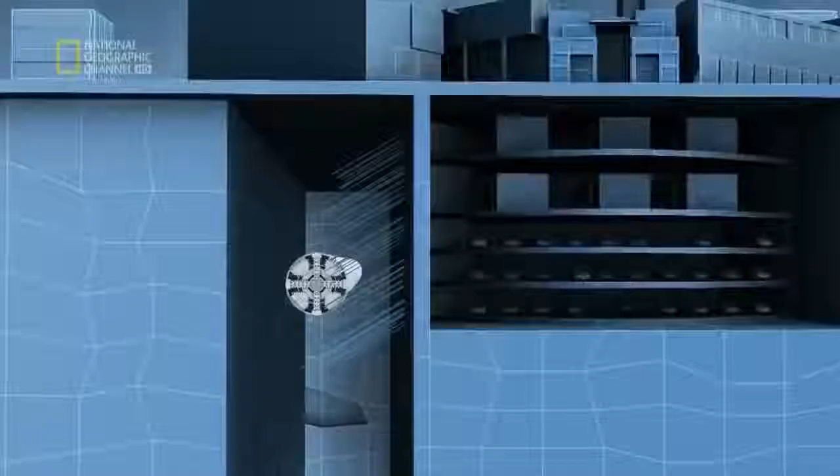But a much bigger hurdle awaits the TBM 774, an underground tangle of steel wires that could bring the TBM to a standstill. 30 meters beneath Kuala Lumpur's nightlife hotspot, Bukit Bintang, engineers excavating the underground section of the city's new MRT encounter an unexpected obstacle. Contractors of a shopping mall adjoining the street have left steel wires known as ground anchors in place, and these are bang in the path of the TBM.

Put into the ground as temporary supports for the basements, they could hold up work for months. It's very difficult to find them from the surface, and you cannot remove them from the basement anymore because the permanent walls are built, right? They are all covered. Since the steel wires cannot be extracted, a decision is made to push on through with the TBM. But there is a continuous risk that the drill head may become entangled and damaged in the wires.

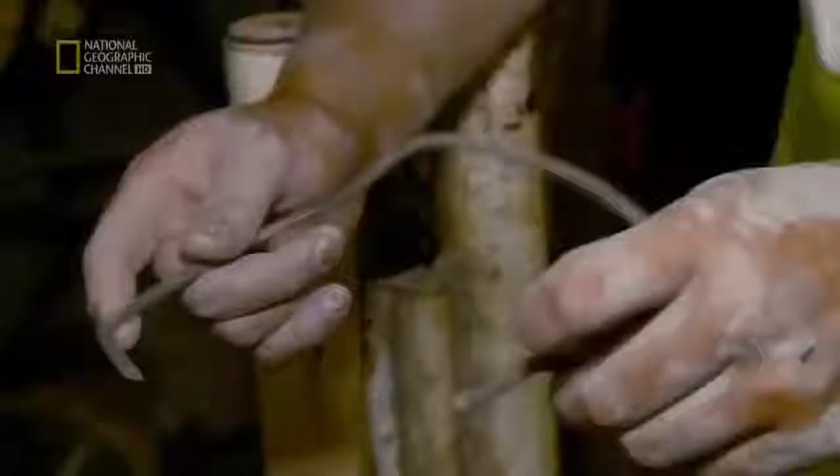It is the task of engineer Hugh Wei Hon to monitor the tunnel ahead. So in the morning, actually, we found some ground anchors dropped underneath the conveyor belt, and we decided to stop the TBM, look for the ground anchors, cut it, and remove it. A team now has to enter the space around the cutter head at the front of the TBM. There's little space to maneuver, and temperatures are close to 40 degrees Celsius.

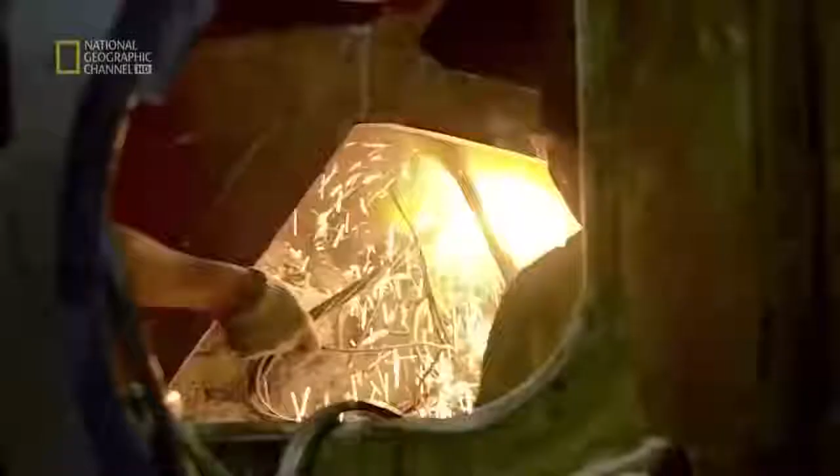To overcome this tangle, first, the team washes away earth from the cutter, exposing the snarl of steel wires caught in the cutter head. These must be cut away with an oxyacetylene torch. It's a laborious process. Every time they hit the ground anchors, the TBM halts as the wires are trimmed away. It takes 2 weeks to mine through this web, but it could have been worse.

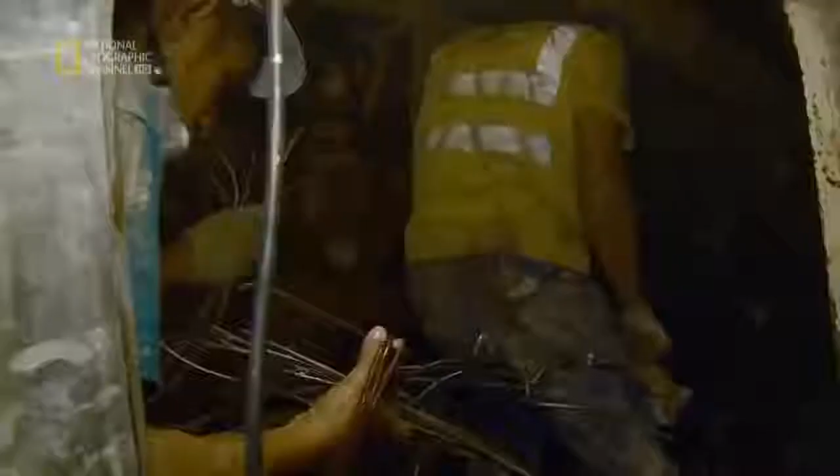If we had hit all the ground anchors that we expected, it would have delayed the project by about 3 to 4 months. And we were able to go down and cut these ropes so that they weren't stopping the cutter head from turning, and we carried on.

It's the final breakthrough. After 23 months of excavation, from tomorrow, the TBM will fall silent. The honor goes to TBM 774. This was the first TBM to be launched into the limestone labyrinth under Kuala Lumpur. It has burrowed its way through almost 5 torturous kilometers of rock and soil. Now it must make the final breakthrough. It's a thrilling day for the engineers inside the giant machine.

We are about to break through. We have about 400 mm left on the cut. Hopefully we'll get a successful breakthrough. What's happening now is we're cutting the D-wall, so that's basically the barrier between us and open air. So this is a very exciting moment for us. Any moment now, maybe within the next half an hour, we'll be out to the station.

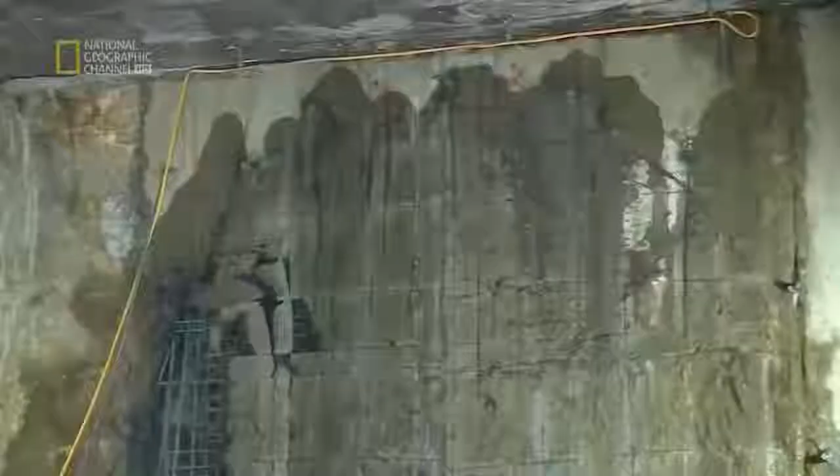This is actually the first TBM that we launched back in 2013. Just short of 2 years, we have done 20 kilometers of tunneling. This is a great day for me and for the whole team.

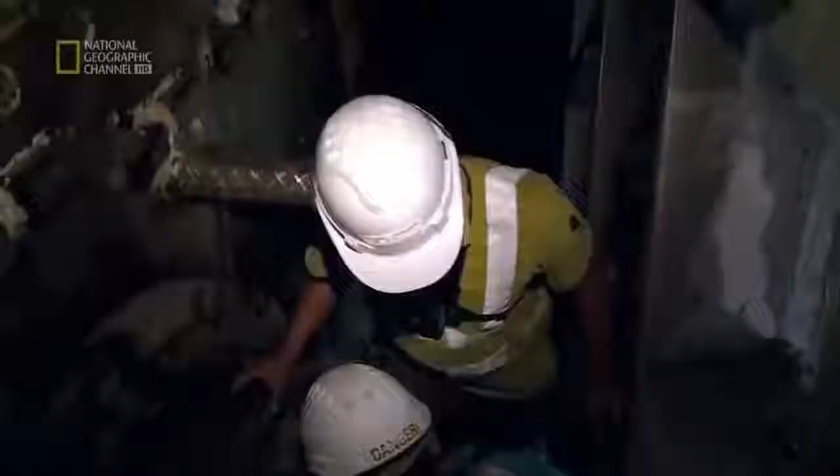Just weeks ago, MMC Gamuda won the Technical Innovation of the Year award for the variable density TBM in the United Kingdom. It's the biggest development in TBM technology in the last 25-30 years. So we have witnessed something new in this business. These are the most versatile machines in existence at the moment. This is the future.

The last breakthrough is a landmark moment. Now the race is on to complete the stations and get the MRT running. Only then can Kuala Lumpur's clogged up traffic arteries become truly open for business. You're basically going to live in a modern metropolis of the 21st century. This is the new world that people of Greater Kuala Lumpur can look forward to. A city seamlessly integrated by overground and underground MRT lines, linking together the city's heart and its far-flung suburbs, where today's gridlock is a distant memory.